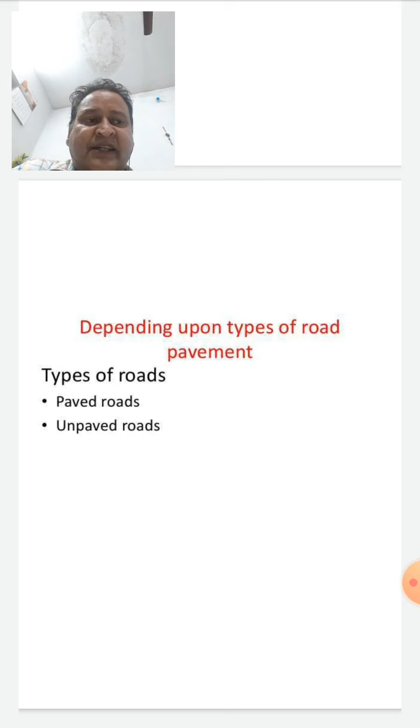So depending upon the types of roads, we have classification of roads like all weather roads and fair weather roads. Under all weather roads we have paved roads and unpaved roads. What is paved roads? It is basically a hard pavement course in multi layers. These are bituminous roads. Another is unpaved roads. These are earth roads, or you can call them gravel roads.

Then we have types of roads as per the surfacing. We have surfaced roads or unsurfaced roads. So what is surfaced roads? Those which are provided bituminous or cement concrete surfacing. If roads are flexible, then we will use bitumen. If roads are rigid, then we use cement concrete surfacing. For unsurfaced roads, both these things are not provided. These are unpaved roads only.

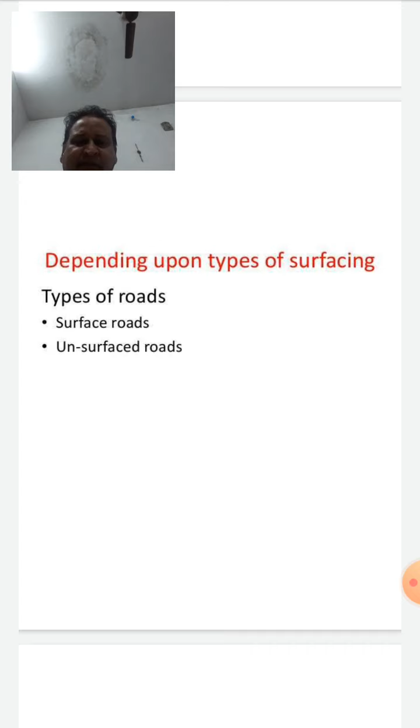I have already discussed that during this first road plan for 20 years they fixed the Nagpur road plan. So various roads were classified, namely national highways, state highways, major district roads, other district roads and village roads. Again, under the third road development plan, the road system classifications were modified. They were classified in three systems: primary, secondary and tertiary. Under primary system, they fixed expressways and national highways. Under secondary, state highways and major district roads. Under tertiary system, other district roads and village roads come.

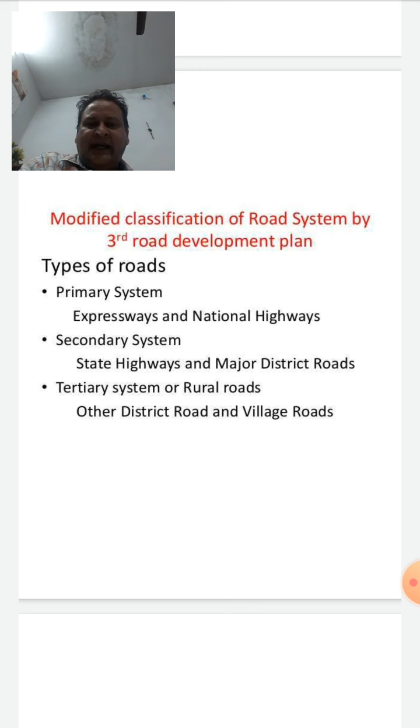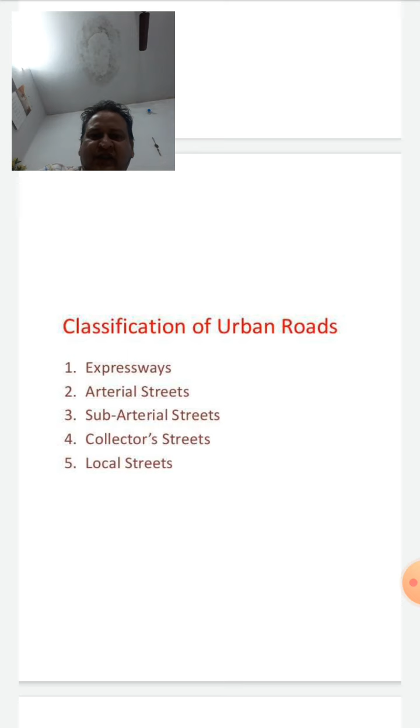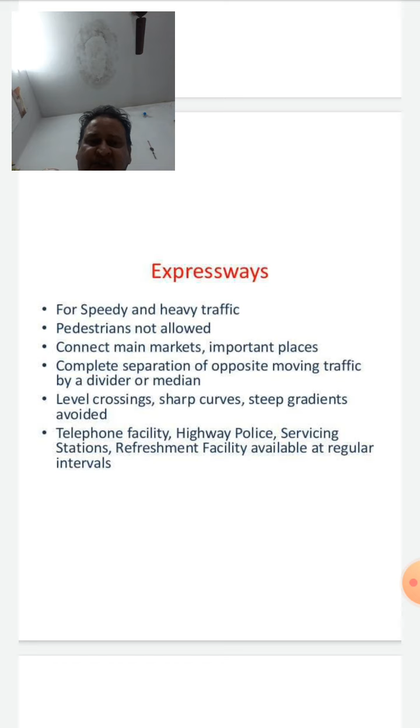Then if we talk about classifications of urban roads, we have expressways, arterial roads, subarterial streets, collector streets and local streets. Now what is expressways? The meaning itself reveals that it is recommended for speedy and heavy traffic. Pedestrians are not at all allowed. It connects main market and important places, with complete separation of opposite moving traffic by a divider or median. Level crossings, sharp curves and steep gradients, these three things are avoided. Telephone facility, highway police, servicing stations and refreshment facilities are available at regular intervals. You can see here in the slide.

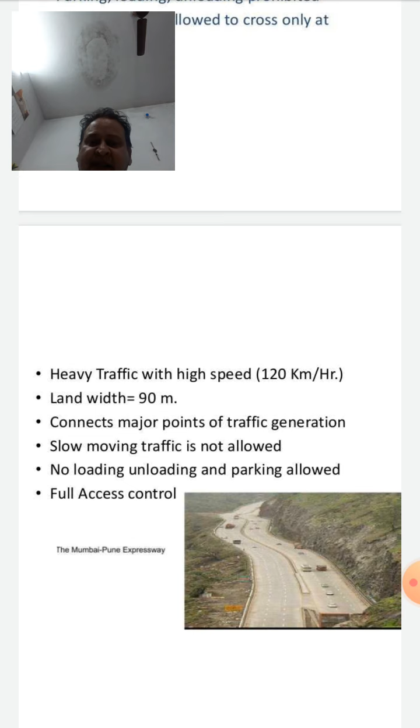So here high speed vehicles will move with a speed limit of 120 km per hour. Generally we keep land width 90 meter. It connects major points of traffic generation. Slow moving traffic is not allowed. No loading, unloading and parking is allowed on expressways, and there will be full access control of these expressways.

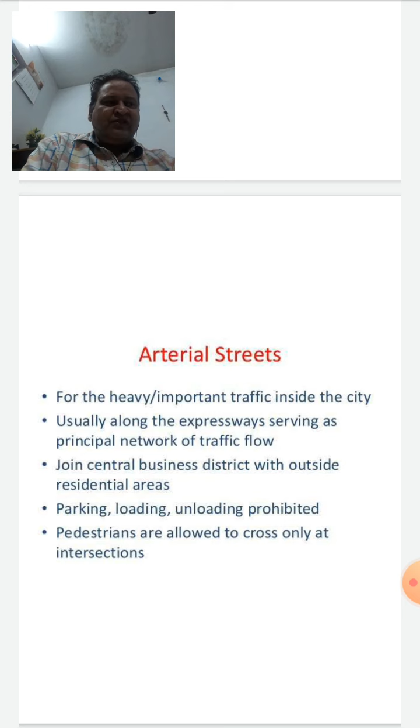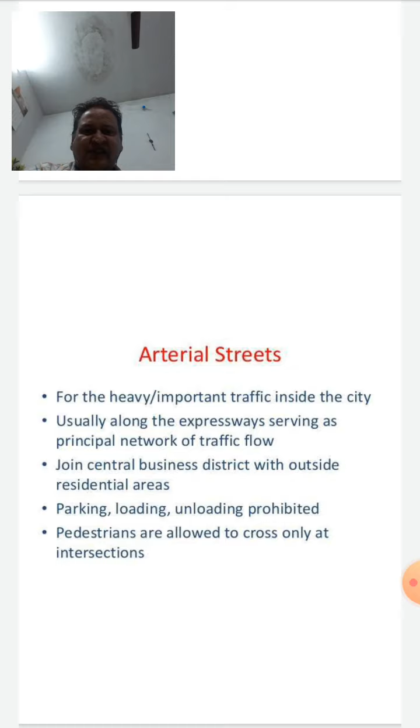So, now what is arterial roads? Arterial roads give connectivity between towns of state highways and national highways. It passes within city limits and carries great masses of traffic. These roads include ring roads and bypass roads, and these are uninterrupted roads which serve high speed vehicles. Central business districts joined with outside residential areas also get connectivity through arterial roads. Parking, loading, unloading is prohibited on these roads. Pedestrians are allowed at intersections, and the speed limit fixed is 80 km per hour and land width kept is 50 to 60 meter.

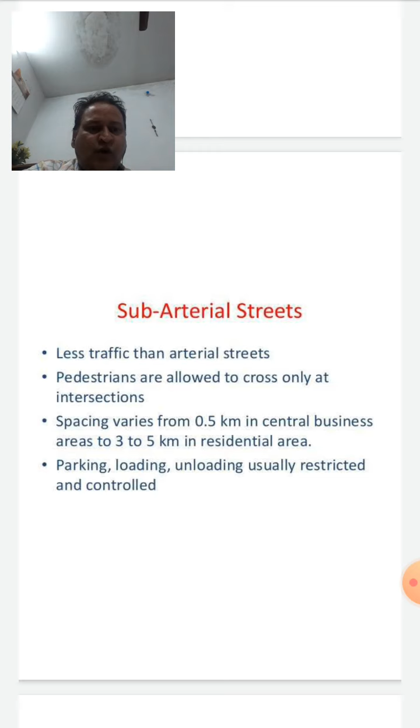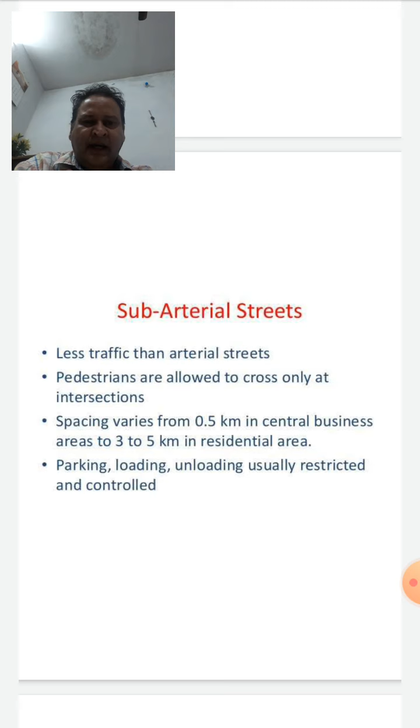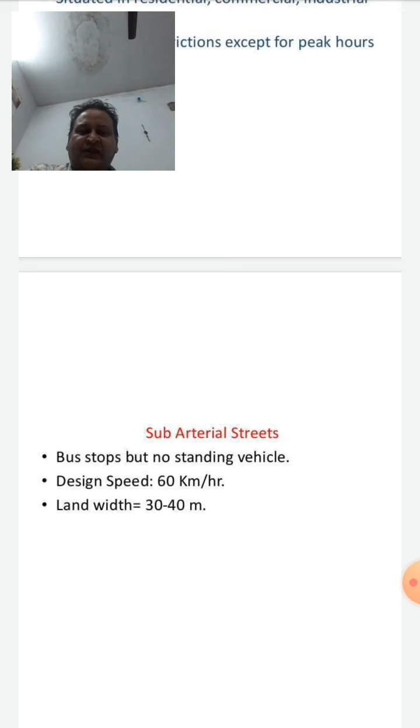Sub-arterial roads are again within the city limits and connect important towns of the state only. These roads serve slow moving traffic. Intersections are provided, traffic signal systems are introduced, and parking, loading, unloading is usually restricted or controlled. At bus stops, no standing vehicles are allowed. Speed limit is kept 60 km per hour, and land width will be kept 30 to 40 meter.

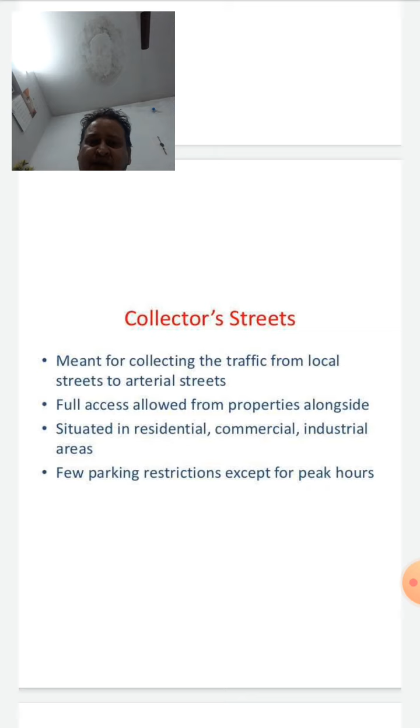Collector streets are meant for collecting the traffic from local streets to arterial streets. Full access is allowed from properties alongside, situated near residential, commercial and industrial areas. It gives great connectivity between these three. Few parking restrictions, except for peak hours, will be kept.

Another, we have local roads, which we can call minor roads. They collect traffic from the various pockets of the city or town. These roads will not touch the arterial and sub-arterial roads. Then we have streets also. They serve the internal portion of a local area, giving connectivity to residential, commercial and industrial areas. Then we have pathways, meaning pedestrian ways or footpaths. These are in front of shops and premises, and vehicle traffic is not at all allowed to move on these pathways. These are kept for the movement of public only.